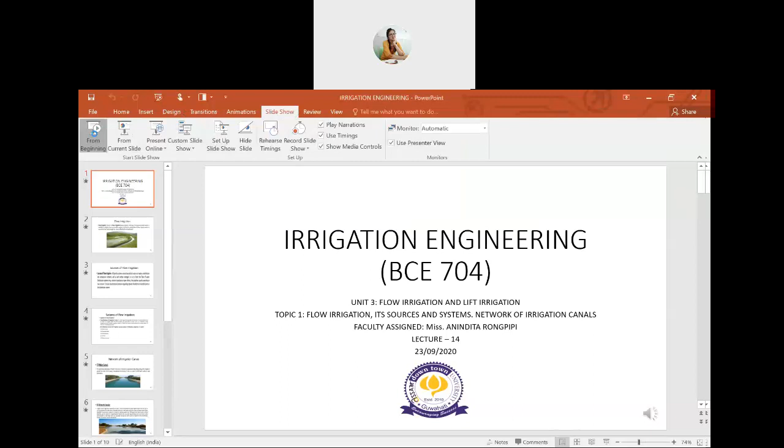Dear students, today we'll start a new unit number 3, which is flow irrigation and lift irrigation. So the first topic is what is flow irrigation, what are its sources and systems, and the network of irrigation canals. So first, what is flow irrigation? Flow irrigation is also known as gravity irrigation. Gravity irrigation or flow irrigation is the type of irrigation in which water is available at a higher level so as to enable the supply to the land by gravity flow. So, in flow irrigation, water is supplied to the fields through the canals taking off from headworks.

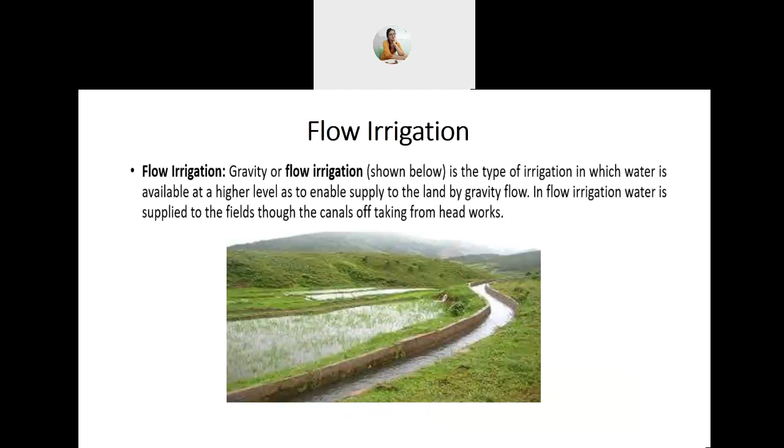Next, sources of flow irrigation. All gravity systems consist basically of a source of water, a distribution and conveyance network, and a land surface arranged so as to direct the flow of water. Distribution systems may consist of pipelines or open ditches, the pipelines usually operating at low pressure. Turnout structures and pressure regulating devices therefore are essential parts of the distribution system.

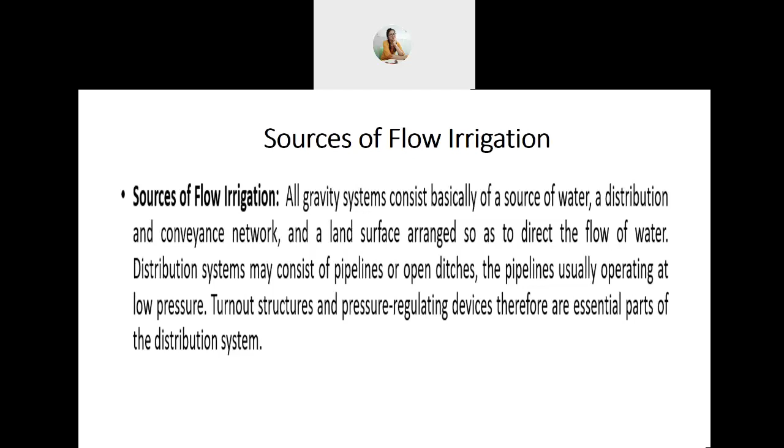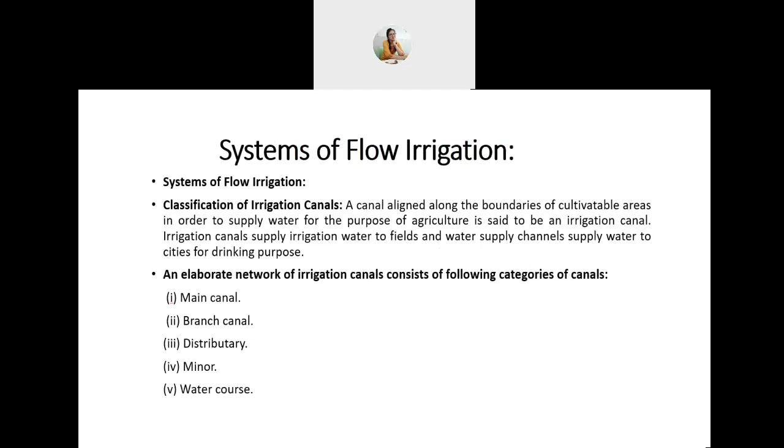Next, systems of flow irrigation. First, classification of irrigation canals. A canal aligned along the boundaries of cultivatable areas in order to supply water for the purpose of agriculture is said to be an irrigation canal. Irrigation canals supply irrigation water to fields and water supply channels supply water to cities for drinking purpose. An elaborate network of irrigation canals consists of the following categories of canals. Number 1, main canal. Number 2, branch canal. Number 3, distributary. Number 4, minor. And number 5 is water course.

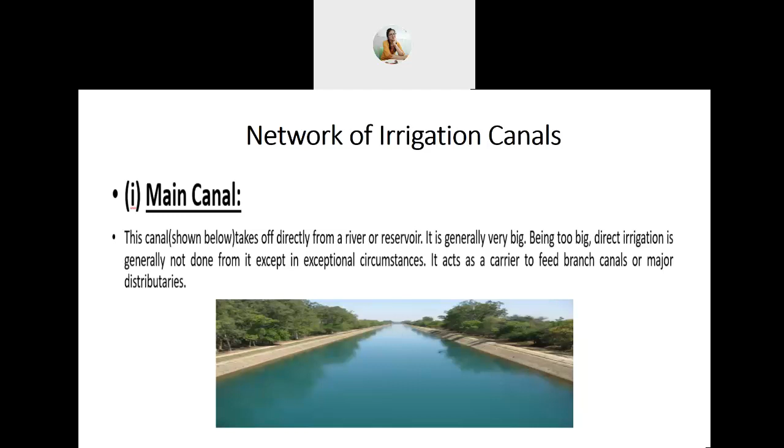Number 2, branch canals. Irrigation area for big canals is generally very large. It may not be possible to supply irrigation water from one canal. In such circumstances, the main canal is bifurcated, that is, divided into 2 or more parts, which are known as branch canals. Each branch canal is assigned the task of irrigating a specified area. Discharge of each branch canal is decided depending upon the area to be irrigated by each.

Branches also carry quite large discharges and as such, direct outlets should be given only to lonely higher spots lying along the alignment which cannot be irrigated from the distributaries. Branches act as feeder canals for distributaries. In this picture, you can see the main canal being bifurcated into 2 or more parts.

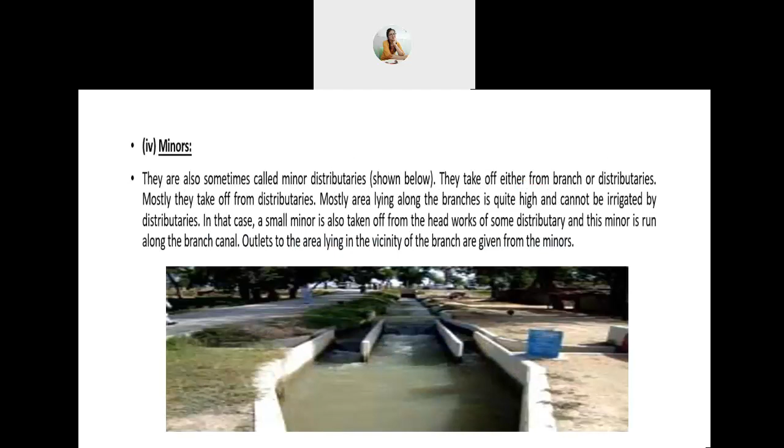Number 4, minors. They are also sometimes called minor distributaries. They take off either from branch or distributaries. Mostly they take off from distributaries. Mostly area lying along the branches is quite high and cannot be irrigated by distributaries. In that case, a small minor is taken off from the headworks of some distributary, and this minor is run along the branch canal. Outlets to the area lying in the vicinity of the branch are given from the minors. This is a picture of minor canal.

Your assignment for lecture number 14 is you have to differentiate between flow irrigation and lift irrigation. And you also have to give the names of the districts in Assam where flow irrigation or lift irrigation are practiced mostly. You only have to give the names. Now we'll go through a video which will be useful for your understanding of flow irrigation and lift irrigation.

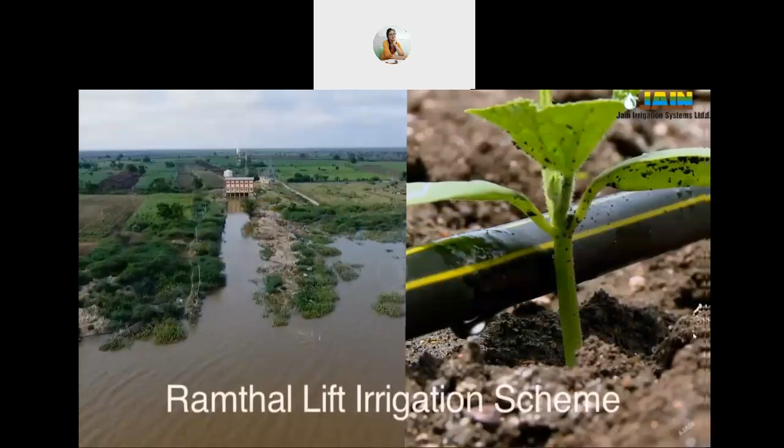Come to the world's largest integrated micro-irrigation project, Ramthal Lift Irrigation Scheme. Located at Hungund Taluk, Bagalkot district of Karnataka, Ramthal project is initiated by Krishna Bhagya Jal Nigam Limited. The entire project is conceptualized on a revolutionary concept of source to root. Hungund Taluk falls under the drought-prone zone of the state. Farmlands are literally starving for water. Farmers mainly grow rain-fed crops like gram, sorghum, chili.

Jain Irrigation Systems Limited. Jain Irrigation, who are the pioneers in micro irrigation, had started the work initially, giving the details of the bulk water supply as well as design details of the laterals and other mains and submains.

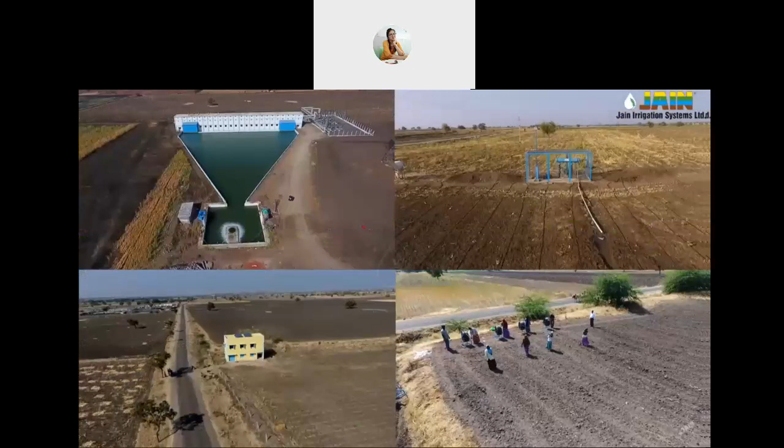Ramthal is a path-breaking community irrigation project and is one of its kind not only in India but in the world. Beneficiary farmers are getting multifold benefits like doubling income and higher profits, assured irrigation for 2 crop seasons, can grow cash crops, reduction in fertilizers and agricultural inputs, improvement in soil health, expert agronomical advice at their doorstep, market linkage and better price for produce. In a nutshell, Ramthal project will make agriculture sustainable and will bring prosperity for the beneficiary farmers.

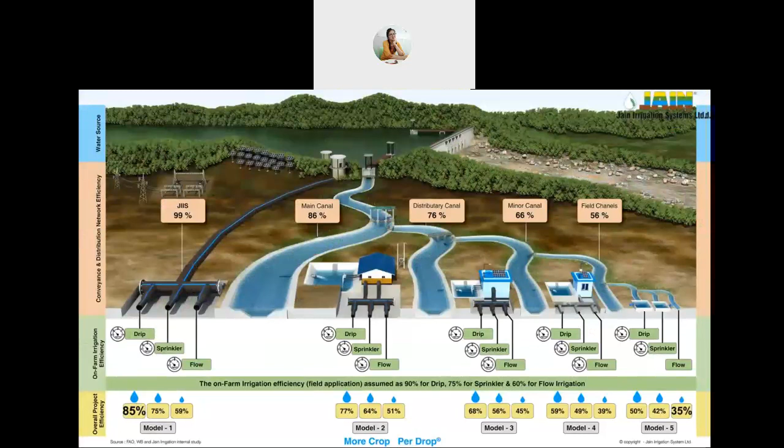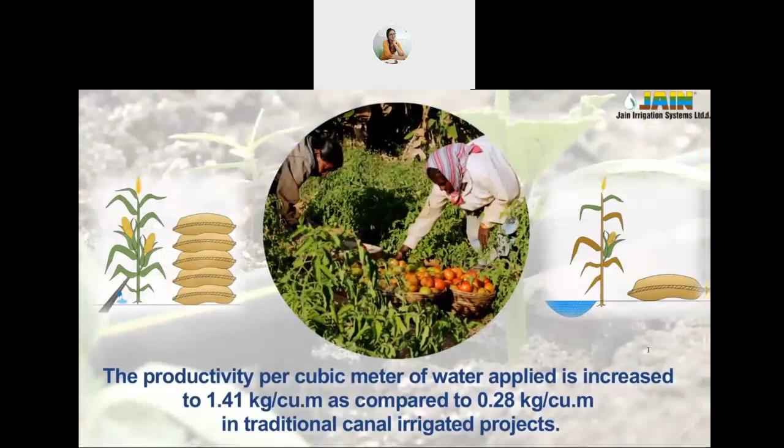Government of Karnataka also benefited in many ways like increase in water use efficiency over 85% as compared to 35%. Doubling the irrigable area with available water. The productivity per cubic meter of water applied is increased to 1.41 kilogram per cubic meter as compared to 0.28 kilogram per cubic meter in traditional canal irrigated projects. Equitable distribution of available water.

Energy savings up to 50%. Minimum land acquisition and rehabilitation expenses. Reduced implementation time. Stopped migration of farmers and farm laborers. Overall increase in irrigated land. Increased cropping intensity resulting in higher agri production. Being a public-private partnership model, effective and reliable performance, higher contribution to the exchequer.

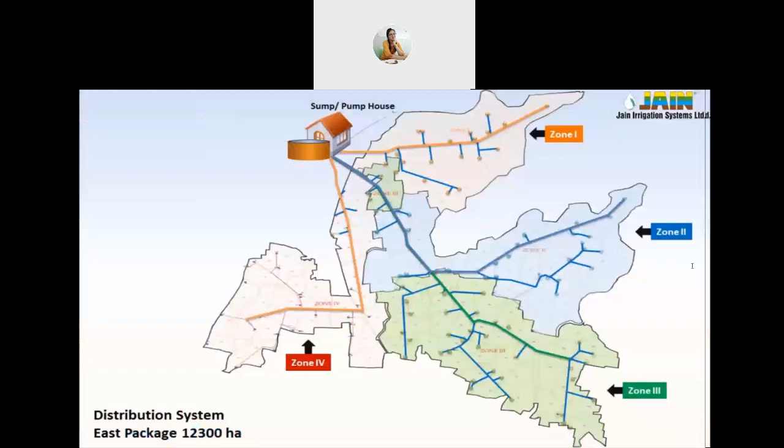Water from River Krishna is lifted from Narayanpur Reservoir to stage 1 and flowed to stage 2. Then from stage 2 of West Main Canal to the sump of Ramthal Drip Irrigation Project. At the sump, water is pre-filtered through advanced rotoclean suction filter to prevent large debris coming to the pumping machinery. Each zone has its own pumping station. There are 12 energy-efficient pumps.

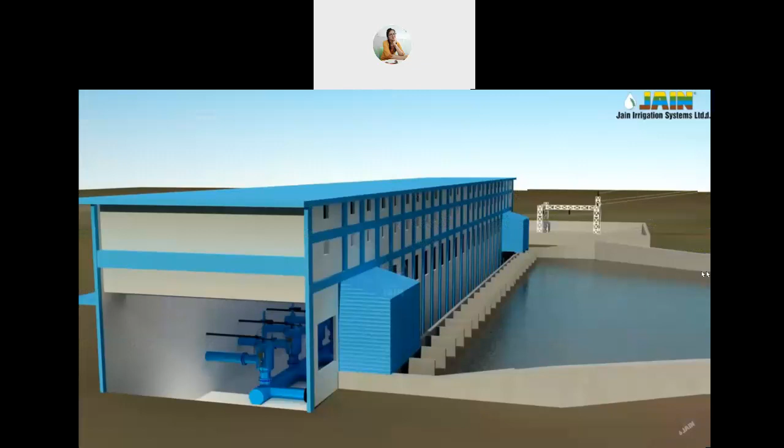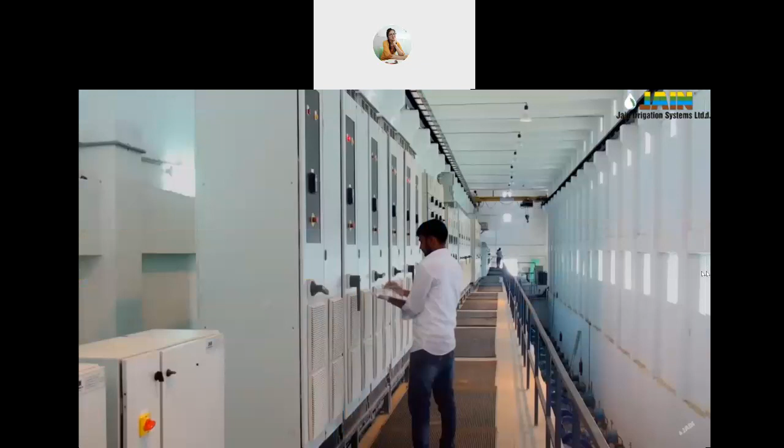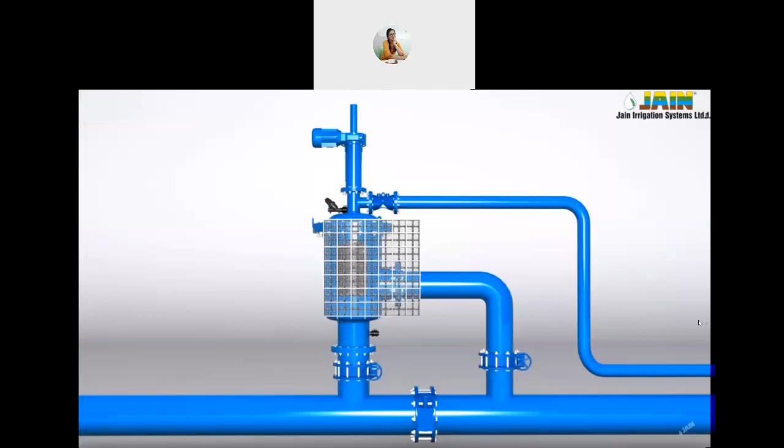All pumps are operated through a variable frequency drive or VFD. Advanced SCADA system controls the operation of pumps on the basis of feedback received from pressure and flow sensors. Water is further filtered through state-of-the-art, fully automatic, online, smart clean electric filters. Its high-quality quadra-layer stainless steel screen filters out the dirt, sand and soil particles. The smart clean mechanism of the filter automatically cleans the filter element.

The filtered water further flows through high-capacity, high-strength HDPE pipe rising main. These pipes have an estimated life of 100 years. They can withstand abusive field conditions and are easy to repair and maintain. Water then enters the block of 100 hectare where it is again filtered through fully automatic, hydraulically operated online smart clean hydraulic filter to ensure that only clean water enters the drip irrigation system.

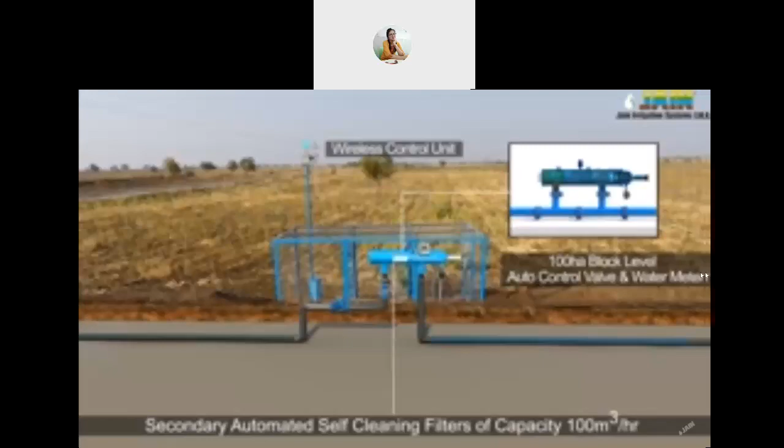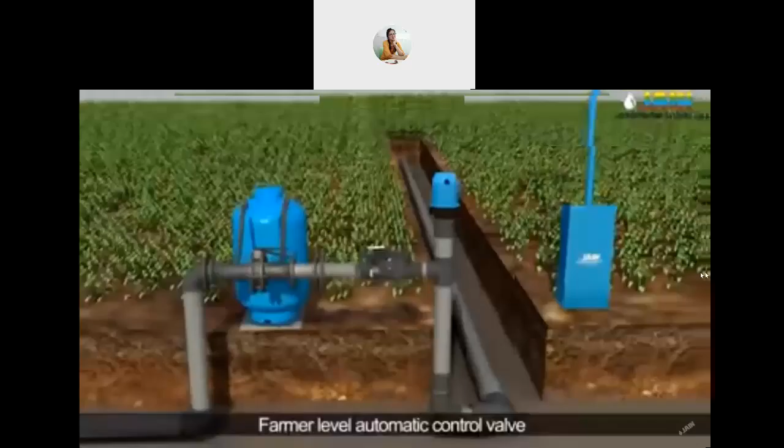At the block entrance, pressure and flow is regulated through a pressure reducing and flow limiting valve. A pressure transmitter is used to monitor pressure fluctuations within the block. Ramthal project is operated in the most farmer-friendly manner. Every farmer in the project area is separately allotted a wireless controlled automatic valve to operate the irrigation system of his farm. A fertigation unit is provided to inject required quantity of fertilizers directly to plant root zone.

Every farm is provided with Jain Irrigation's most popular 5-star rated drip line. Its state-of-the-art clog-resistant dripper design provides maximum uniformity and efficient performance for years. The system is designed to produce an application rate of 2.4 mm per day in Kharif season and 4 mm per day in Rabi season, with around 24 hours of operation per day.

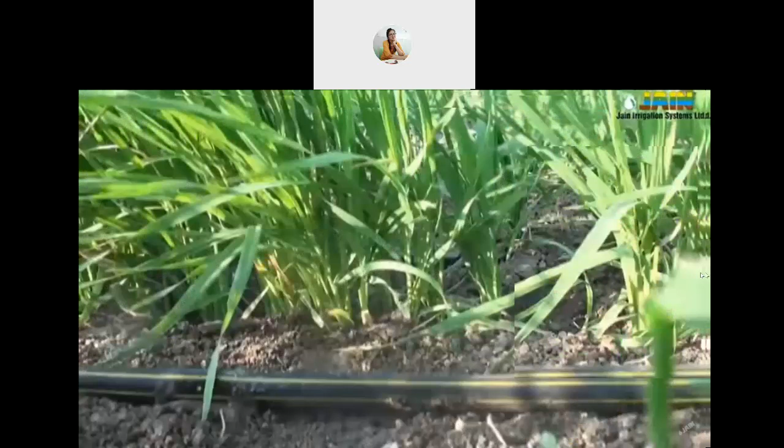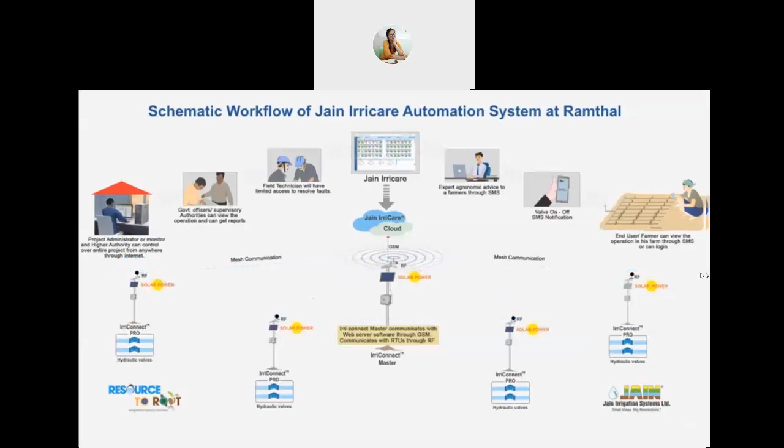Operation of such complex system is controlled and monitored through highly sophisticated web-based Irricare irrigation management system. Every user can access and monitor the operation of his irrigation system through the internet. Valve operation schedules are uploaded to Irricare software. These schedules are then transferred to master controller called as Irriconnect Master through GSM communications. Irriconnect Master distributes schedules to each wireless remote terminal unit called Irriconnect Pro. Irriconnect Pro stores the schedules and operates the field control valves.

Irricare Master has got an excellent user management facility. All the registered users receive an SMS alert for their valve on-off schedule. The user database can be easily generated and filtered according to crop growth stage, and area under each crop. Irricare also facilitates expert agronomists to broadcast bulk messages to the farmer having specific crop regarding crop care and pest or fertilizer management.

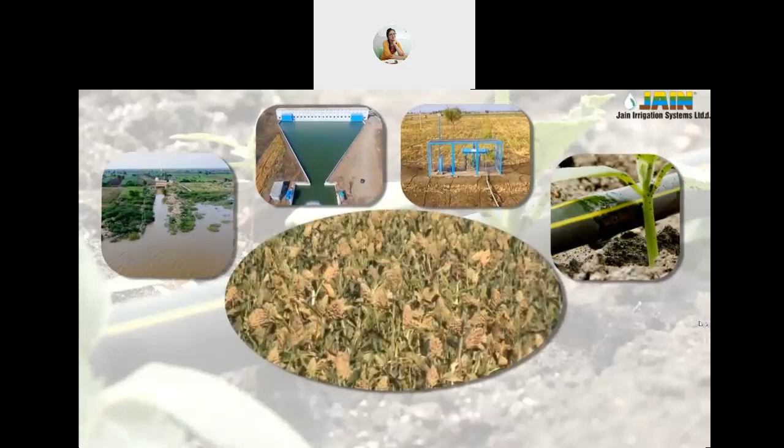Our expert team of agronomists is imparting crop-related training to the farmers. Farmers are also trained for operation and maintenance of drip irrigation system. Ramthal Irrigation Project is showcasing the sustainable farming effort to achieve water and food security for the nation and promises more crop per drop. Jain Irrigation is proud to be a part of this project. Jain Irrigation Systems Limited, an integrated irrigation solutions provider.